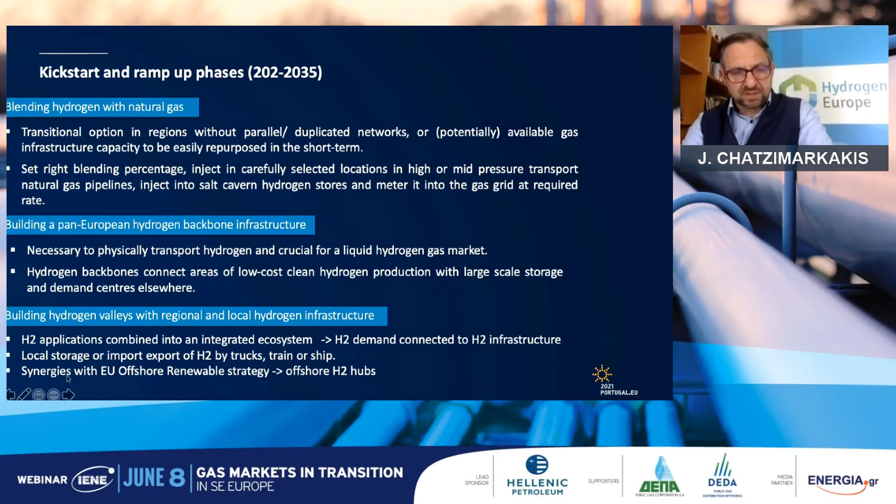And also there will be synergies with other renewable offshore strategies, especially the 300 gigawatt offshore initiative of the European Union will be part of it. This is how this could look like in combination with offshore wind. So we will see the hubs or the production of hydrogen also offshore, and then the transport could happen using existing or newly built pipelines, especially in the North Sea.

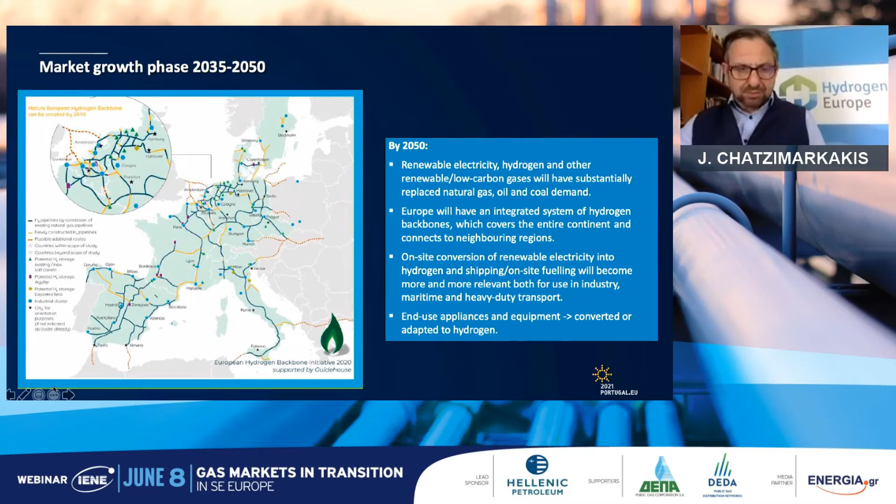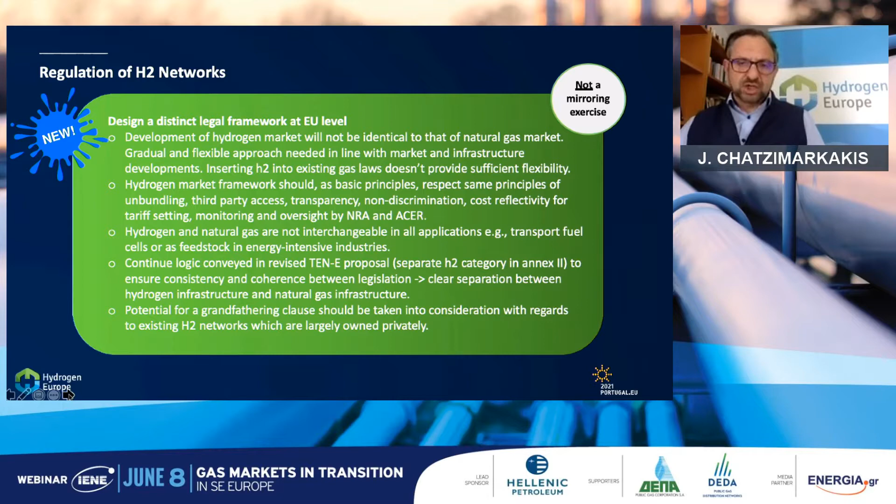I think I'll stop my presentation here. I'm not going through the last slide, as this might be very specifically towards the regulatory issues that we need to have. What I can say, though, is that we would need a distinct hydrogen legislation. We will see next week some specification on the Renewable Energy Directive by the European Commission, where a lot of links to hydrogen are already given. But there will be a second legislative approach end of this year.

It's called the Smart Energy Sector and System Integration Package, which is foreseen for the low-carbon gases, because we also need to see that other technologies rather than renewables, like pyrolysis, splitting methane, natural gas, into hydrogen and carbon black or solid carbon, will play a fundamental role in the years to come. And of course, also carbon capture and sequestration from biomethane following an SMR, steam methane reforming, will play a big role in the production of hydrogen,

and will have a minus effect on CO2 emissions, as you take CO2 basically from circular or from biogenic sources, non-fossil, and capture and store them. This will have a positive minus effect.

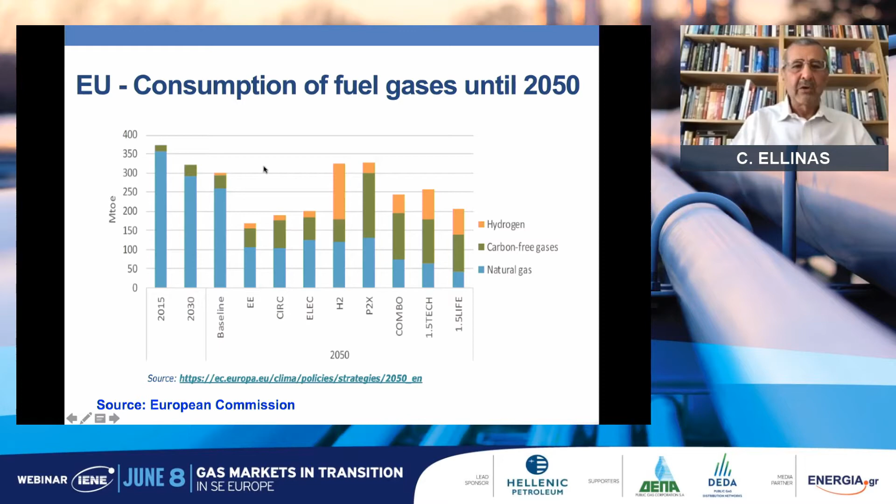And this shows the results of a study by the European Commission, which shows that by 2030, gas demand in Europe should drop by, say, 20%, and then gradually by 75 to 80% if these new policies are going to take hold. And I say should because this still needs to be demonstrated.

But let's talk about the big oil sector shakeup. In May, the big oil sector faced major problems. First of all, a court in the Netherlands, as you probably know, ordered Shell to cut emissions by as much as 45% by 2030, not just from its operations, but more importantly, from the oil and gas it sells and the products it sells, which makes it very hard.

And in the US, shareholders backed activist investors at ExxonMobil's AGM, who won three board seats, promising to basically force the company to move more and more towards renewables, the same way as BP and Shell, and cut production of oil. Chevron shareholders approved the proposal to force the company to substantially cut pollution based on the products it sells, not just its own operations. In order to achieve carbon emission cuts at these scales, the IOCs will be forced to make substantial cuts to their oil and gas production and divert future investments decisively into cleaner energy.

The activists that achieve these wins are now emboldened, and they are determined to try and drive more change within the IOCs. And in the Western world, this is possible. A growing number of IOC shareholders agree with IEA's call for more drastic action to be taken to combat climate change. Very clearly, winds of change are blowing throughout the entire industry that cannot be ignored.

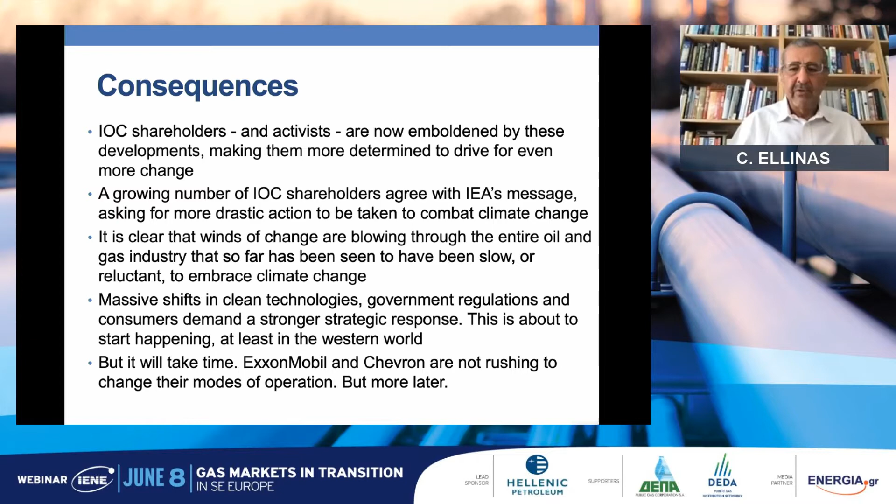Massive shifts in clean energy technologies are making the transition increasingly easier, but it will take time. ExxonMobil and Chevron are not rushing to change their modes of operation, but more of this later. This is the result of a study by the IEA on achieving net zero by 2050. This is what needs to be done to achieve net zero.

Oil production, in their eyes, should have already peaked, and it should go down from now onwards to as low as 10% of current use by that time. And LNG exports should peak by 2025 and drop dramatically from there onwards. This is a wish list. It's not reality. But the IEA says that if you want to achieve net zero by 2050, this is what you need to do. But it's not all doom and gloom for the oil and gas industry.

Asia does not appear to be ready to follow these developments. Globally, demand for hydrocarbons continues to be robust. And these developments will not change that for some time. Even Ben van Beurden, Shell CEO, said that if the IOCs do not supply this oil and gas, someone else will. And the national oil companies, such as Saudi Aramco and Rosneft, are ready to step in and do exactly that. They are actually stepping up their investments now.

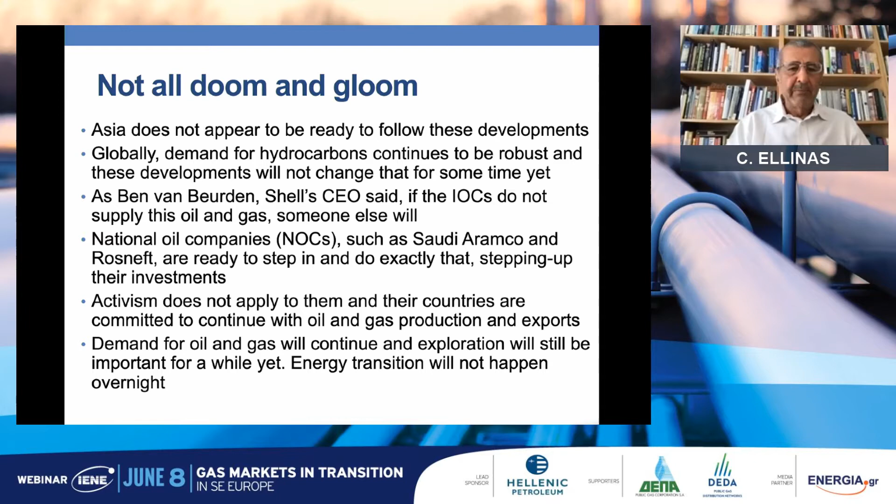Activism does not apply to them and their countries, and they're committed to continue with oil and gas production as long as needed. Demand for oil and gas will continue, and exploration will be important for a while yet. Energy transition will not happen overnight. But as far as the EastMed is concerned, it's actually what happens to the IOCs that matters, not to the NOCs. The IOCs are the companies on which the EastMed depends to materialize. And they are under increasing pressure, both in the European Union and the United States with Biden as president.

As a result of these developments, the IOCs are already planning to spend a lot less, with the risk that later in this decade, supply shortages may lead to higher prices. The trend for the IOCs will be contraction to core regions and projects with less appetite to take on new areas. That could be a problem for the EastMed. It's a problem in coming. They're being forced to concentrate on higher returns, lower carbon, based on lower capital and cost programs, by investing in only the highest return projects.

So, what is the impact on the EastMed? These changes will have a major impact on operations worldwide, including the EastMed and Cyprus EEZ. And as I said, we can't count on the NOCs to come and save us. It's the IOCs that we depend on. And if they stop spending, we have a problem. Not only is EastMed gas expensive to develop and get to the markets, but the recent regional turmoils caused by a belligerent Turkey, the Libyan instability, the lingering Israeli-Lebanon disputes, and the Israeli-Palestinian flare-ups are also becoming too challenging for the IOCs to tackle.

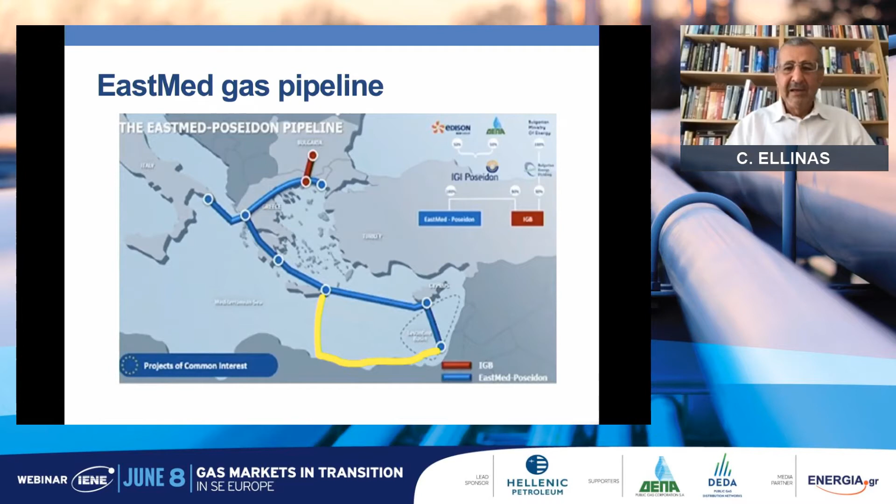So what is the future of energy in the EastMed? The EastMed is no longer a high priority for the IOCs, who are battling for survival in a fast-changing energy world. The priority is to get transition right, and their future development strategies are geared in that direction. Similarly, the EastMed countries must reassess their own energy plans. Outdated policies based on exports developed during the last decade require complete overhaul. Plans based on exports to global markets are fast becoming untenable. The future is regional, with natural gas developed to support the wider deployment of increasingly cheaper renewables.

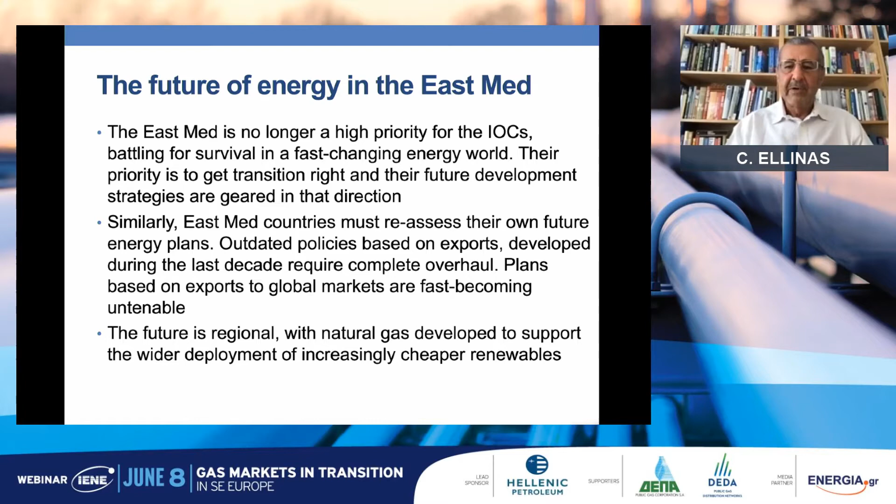We have given to us the whole picture concerning the IOCs, and of course, we have to take that into consideration.

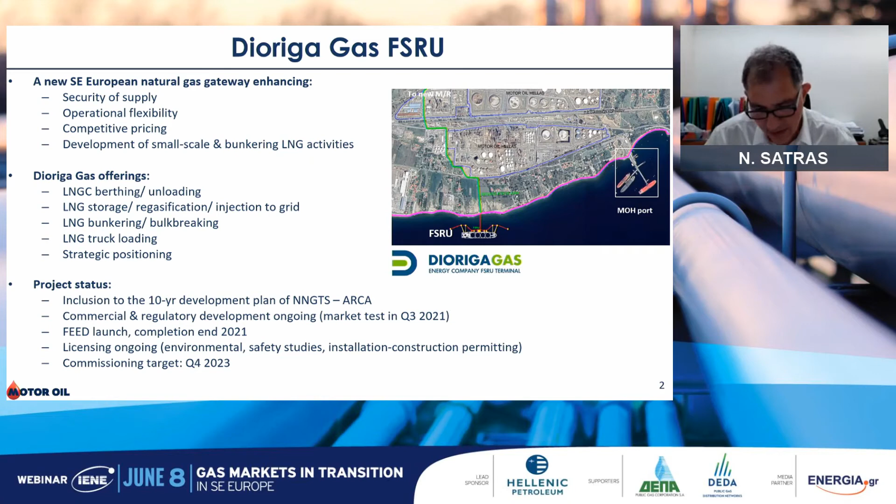But we believe that the time is of essence. The time is now. If we don't invest and support such investments right now, in 3 or 4 years down the road, it will be maybe too late, and there will not be enough time to develop such investments. The time will be lost. So we think this is the time right now.

Apart from this FSRU, we are building also in other forms of natural gas to bring this form of energy to the customers. CNG is one of the applications. We have started with industrial application. Also, we're complementing the CNG offering to the Greek consumers for retail stations. And we believe that the retail station of the future will include electricity. It will include natural gas, and in a different form or maybe different timing, it could also include hydrogen. So we're also thinking and designing the retail station of the future, and surely it will have a much smaller energy footprint.

I'm just saying that because if we don't have a clear signal, not only us as Motor Oil or as investors, but also as ship owners or the industry as a whole. Should we invest in LNG as marine fuel, or should we wait for alternative fuels, maybe lower carbon fuels or solutions for the future? Okay, the technology that we need to study and we need to assess will be very intense in the next couple of years.

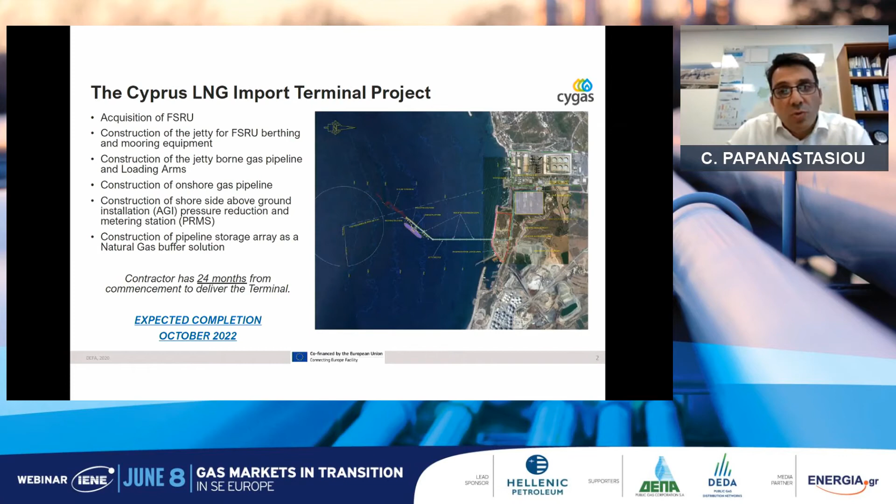As I said, the LNG import project comprised of the infrastructure. The contract was awarded to the consortium of the JV between China Petroleum Pipeline Engineering and Metron SA, with Hudong Shipbuilding and Wilkinson Ship Management Limited.

Then the owner's engineer, this is the contract for our consultant engineers for the oversight and implementation of the project. This was awarded to the consortium of Hill International with Veritas Solution and with Tractebel and Gazosin. And lastly, the insurance advisors was awarded to Aon UK Limited. This contract is necessary in order to secure the necessary pool of insurances for the operations of the project.

In regards to the project financials, we have secured an EU grant of 40% of the capex with a maximum of 101 million. Then our partner in the JV, the Electricity Authority of Cyprus, has provided us with an equity contribution of 43 million. So the equity component is up to 144 million. And we have secured credit financing from the European Investment Bank of up to 150 million, a loan with 20 years duration and favorable terms, and a loan of up to 80 million from the European Bank of Reconstruction and Development, EBRD.

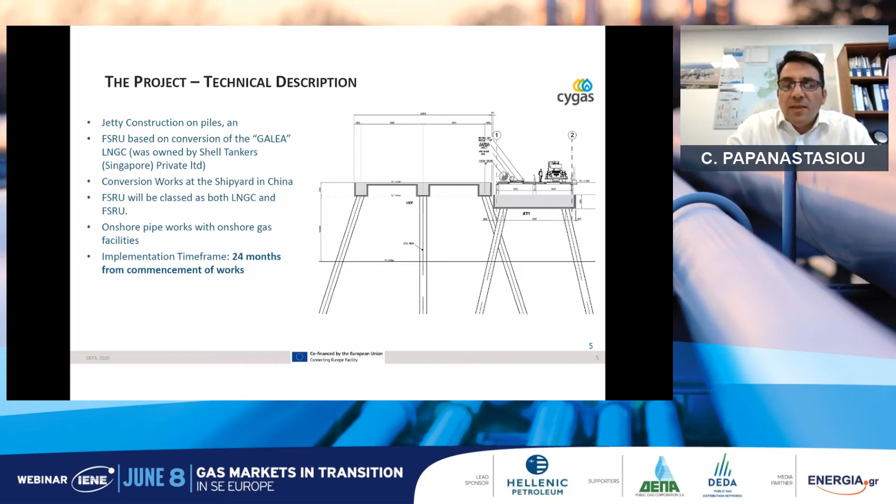The FSRU will be classified both as an LNG carrier and an FSRU. At the same time, the onshore pipe works have begun with onshore gas facilities. So, as I said, the implementation time frame is 24 months from the commencement of works and anticipated to be completed by October 2022.

The vessel, Galea, an LNG carrier, was built in 2002 by Mitsubishi Heavy Industries. It's a Moss containment system with 5 tanks with overall LNG storage capacity of 136,000 cubic meters. In dimensions, it has an overall length of 290 meters, breadth of 46 meters, and the propulsion is steam dual fuel. This is a graph of the vessel.

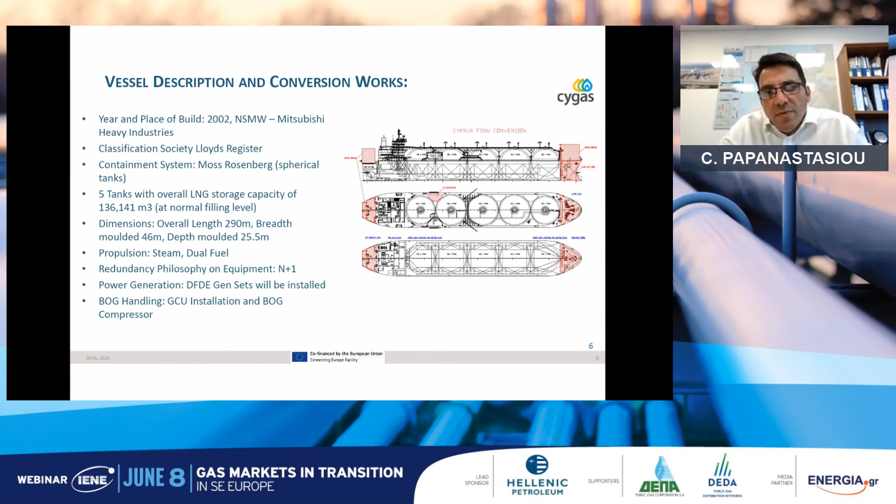Now, after conversion from an LNG carrier to an FSRU, the vessel will be equipped with a state-of-the-art regasification modular unit delivered by Wärtsilä, and the terminal will be capable of receiving LNG from LNG carriers ranging from 120,000 cubic meters to 217,000 cubic meters, so the Q-flex types of LNG carriers.

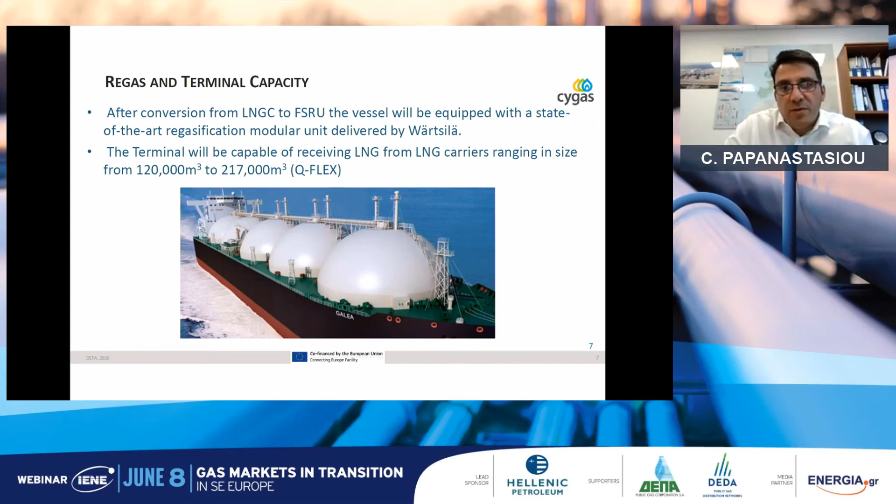Now, we talk about the infrastructure of the LNG project, the import terminal. In parallel, DEFA is the major shareholder in the SPV that will own the LNG import terminal with 70% participation. DEFA will also be responsible for the LNG supply. We have proceeded with the procurement process. This is a two-stage process. The expression of interest, the pre-qualification process, has been completed, and the evaluation of the expression of interest has been completed. And then we will move to the second stage.

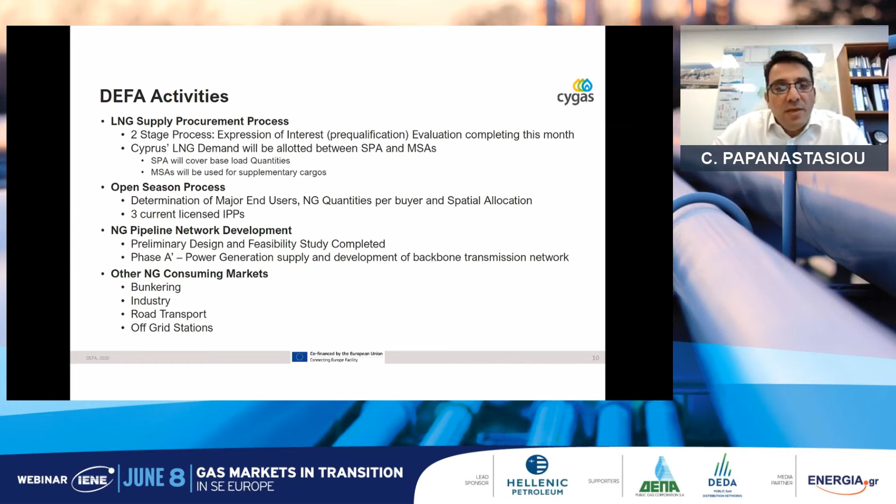The Cyprus LNG demand will be allotted between an SPA and MSAs. The SPAs will cover the base load quantities, while MSAs will be used for supplementary cargoes. As the TSO will be responsible also for the pipeline network development, the transmission system will have hydrogen-ready specs, so it will allow for future developments, such as a blend between hydrogen and natural gas, as other guest speakers mentioned earlier. Other natural gas consuming markets that we are currently evaluating are bunkering, road transport, or off-grid stations.

As I said, the introduction of LNG to the Republic of Cyprus is a project of common interest. It's something that is necessary, and this is understood by both the European Union and the supranational banks that finance the project, in order for Cyprus to pass from the liquid fuel era to the natural gas era as an intermediary step, and then to the renewables and hydrogen era.

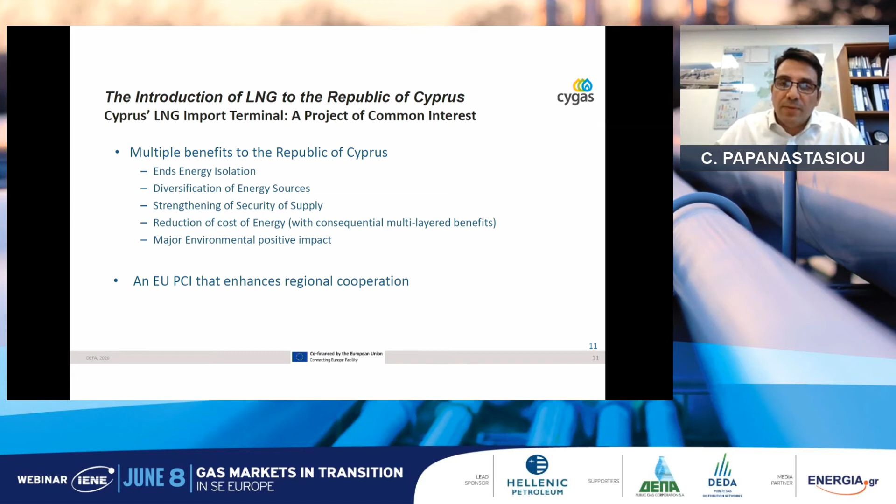It will end the energy isolation of the Republic of Cyprus. It will diversify the energy sources. It will strengthen the security of supply. It will possibly reduce the cost of energy, and will have a major environmental positive impact. That's all from me. Thank you. And I will be answering any questions, either now or at the end.

Okay, Mr. Papanastasiou, we thank you very much for all the information regarding the LNG project in Cyprus. Of course, we're going to discuss a little bit later during the Q&A period. Now, I'm going to give the floor to Mr. Panagiotis Panousos, the Energy Transition Manager of DESFA, Greece. Mr. Panousos.

Thank you. Thank you very much for inviting me to this event. Quite happy to be with you in this panel. A lot of things have already been discussed by previous speakers. So I'm Panagiotis Panousos, working as Energy Transition Manager in DESFA. And as always, first of all, I will go through a basic introduction of my company.

So DESFA is the gas system operator in Greece. DESFA is responsible for the operation of the national gas transmission system, the high pressure system, and also for the LNG terminal situated in Revithousa Island. DESFA was established in 2007, so in a way we are 14 years old. We followed the EU unbundling rules. We have been certified in 2018 as ownership unbundled operator following the third energy package lines.

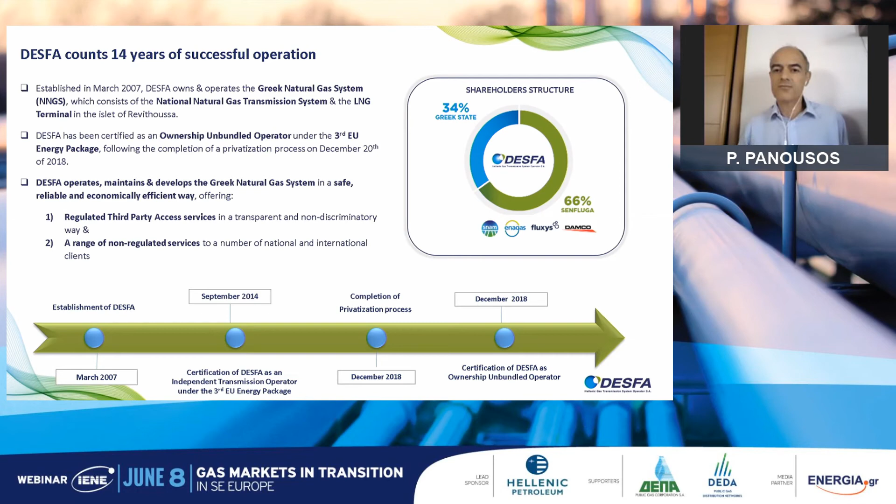In all these years, what we have managed is to be a reliable partner in the area. How did we achieve this? By operating the network with safety, most of all, by developing the system according to the market needs, by diversifying the supply sources, by developing new services, by training our people continuously, by working on the development of a competitive market, by reducing our greenhouse gas emissions, and by participating in international groups, activities, projects.

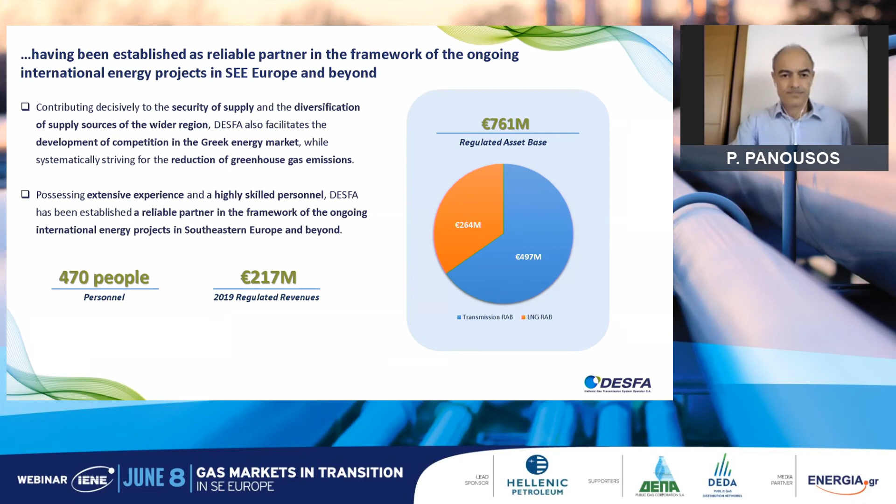I will just put some special stress here on our Revithousa LNG terminal, which is offering a lot to the diversification of supply sources and security of supply, not only in Greece, but also in the area. And now we are in the phase of developing new activities. We are developing a truck loading facility and also a small-scale LNG jetty. Thus, we will be able to open a new market for Greece, the small-scale LNG market, by creating what we call a virtual grid.

We say that we stand at a crossroad, and this is an interesting area in Europe, but actually it has a lot of difficulties. We are in the southeast end of continental Europe. Not easy to create interconnections, but still we are investing, we're creating new extensions, new branches of our pipeline towards Western Macedonia, towards Western Greece and Peloponnese. We are creating new interconnections with adjacent systems. I will mention North Macedonia, TAP, and also Greece-Bulgaria.

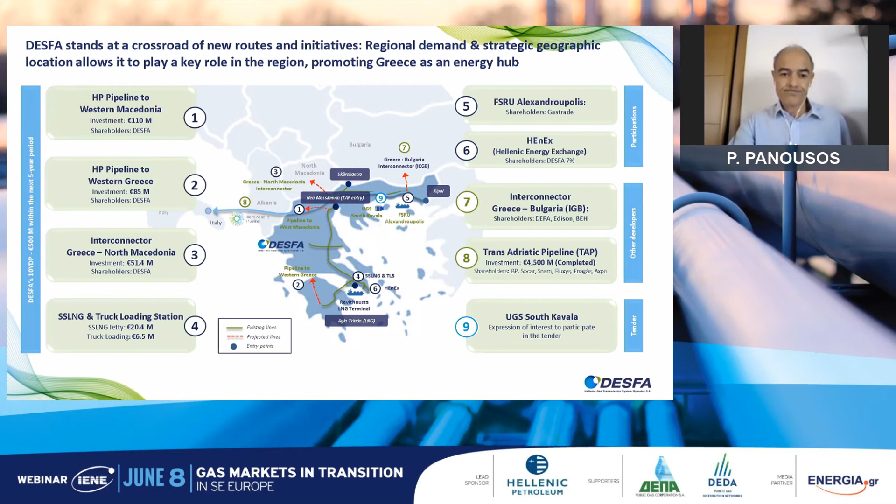So these are some facts, and as you can see, we have a growing gas market in Greece. What you can also see from this slide is that we have created a lot of pluralism in sources, actually mostly coming from LNG vessels. Still, the consumption is dominated by power production. Most of the gas used goes to power production.

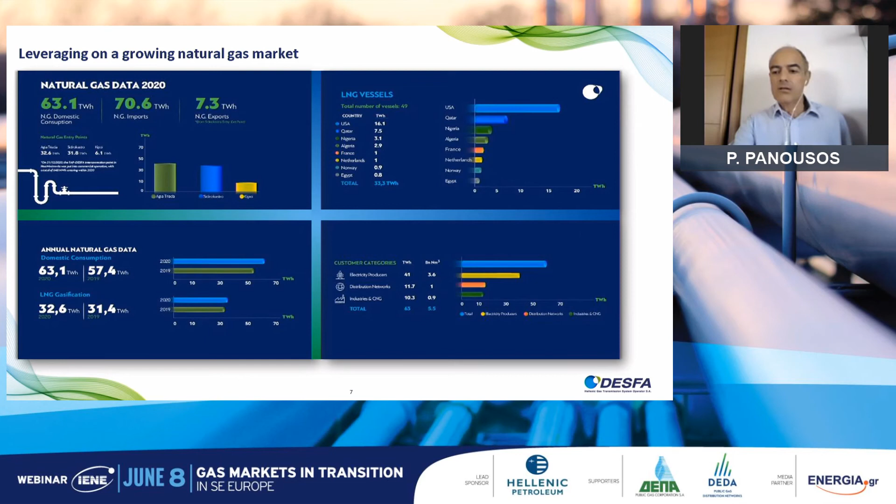Now, I will move forward to the topic of the current panel regarding energy transition and the challenges that we see in our area. So we are in an area with some specificities. And I'm not talking just about Greece, I'm talking about the whole area. There are interconnections missing. Diversification of supplies is not enough. Liquidity and markets are still developing. There are areas not covered even by gas grid.

There are areas which are phasing out lignite, and the direct solution for this is natural gas. We can easily substitute it. And basic infrastructure and market elements are still missing. So we don't have full reverse flows. There are compressor stations perhaps missing, storage is missing, and some network reinforcement.

Regarding future prospects, because it is an area with future prospects, we have to keep in mind that we are in proximity with Middle East and North Africa. So these are areas where potentially they can produce renewable gases in the future. And as we have ports and ships, this is something promising, at least for our country, that we can become a transfer corridor for renewable gases towards the rest of Europe.

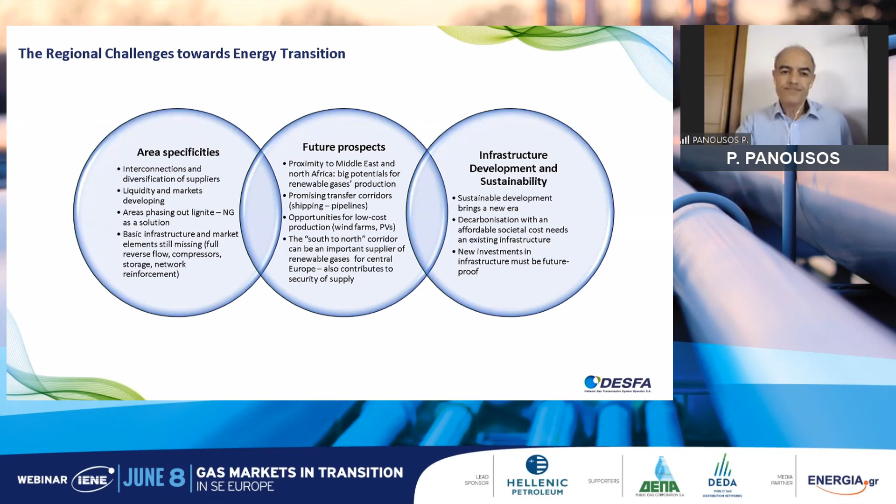Now, regarding the energy transition, as it was said already, it will not happen overnight. There must be certain steps. What you see on the left is not an analysis per sector, it's just some thoughts. Let's start from transportation. And when we say transportation, it's road transportation, it can be rail, it can be ships. So there are different elements behind that.

What we see, apart from what can be easily electrified, like private cars, for example, LNG will have a role for sure for maritime, and that perhaps will be the fuel to be used for perhaps more than one decade. And then maritime can move to bio-LNG or e-fuels and perhaps hydrogen, but technology for that is still in question. Regarding industry, we foresee that it will start being decarbonized by using more quantities of hydrogen, where it is possible, of course.

Regarding residential, we see a role for biogas. I suppose people will not be very happy to change all their appliances; it's not something easy to move to other technologies. So biogas can be a solution, and then e-fuels or hydrogen perhaps. Regarding power generation, for sure, at least in our area, we see that natural gas has a future for some years at least, and then slowly move to hydrogen.

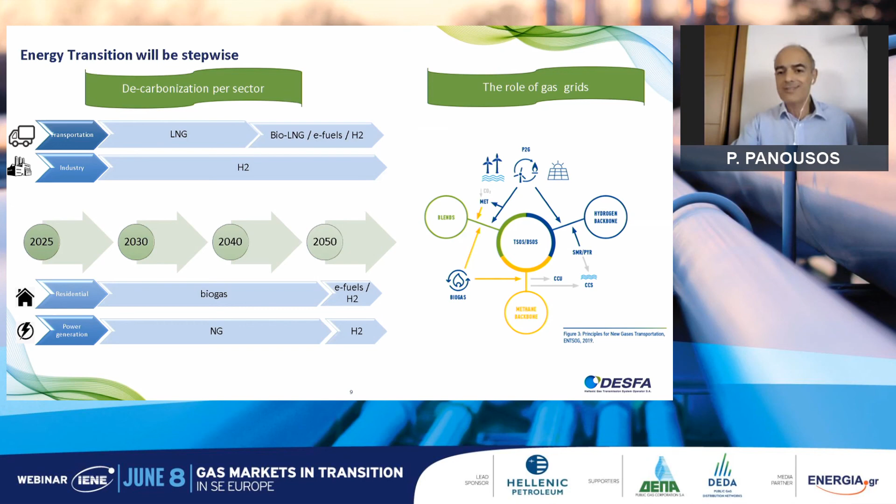How are we preparing ourselves and our network for the future?

Mr. Panousos, we need to speed up. Yes, it's the last one.

Regarding the current network, first of all, we want to accommodate biogas production and hydrogen blends. So we are assessing the network. We will perform gap analysis and the necessary adaptations. Regarding future network and expansions, we are developing new specifications. So we will follow new standards so that everything is ready to accept 100% hydrogen.

And regarding our company, we are participating in different decarbonization projects and studies. We are developing our own long-term strategy, which will be discussed, of course, with all the industry sector and, of course, the regulator. We are participating in the White Dragon cluster project with our own proposal for the blending system and the dedicated hydrogen backbone. And we are developing testing facilities for equipment, and we're also participating in pilot projects like a pyrolysis project.